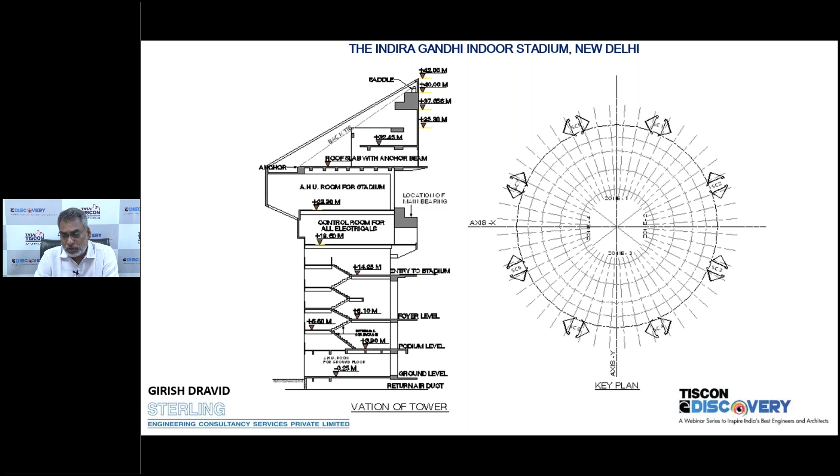All of you might have seen this in Indira Gandhi Indoor Stadium at New Delhi. I think in the first webinar by our chairman Kamal Hadkar, he had dwelt on this structure as well. A very beautiful structure, symmetrical one with 8 pylons and a beautifully crafted space frame.

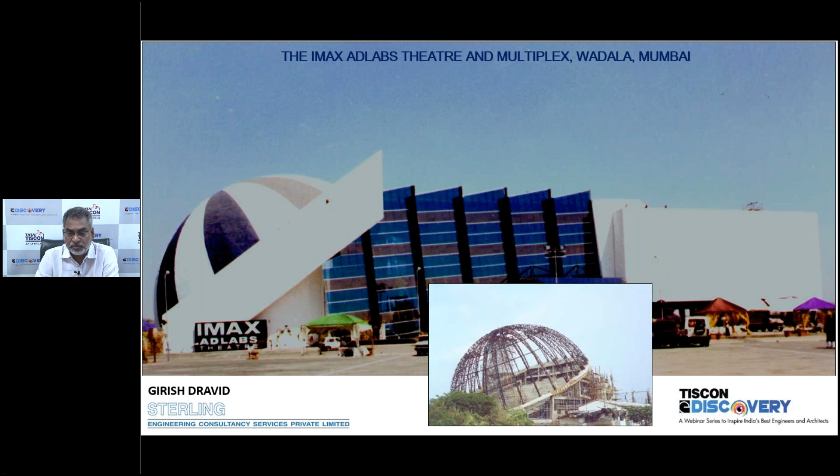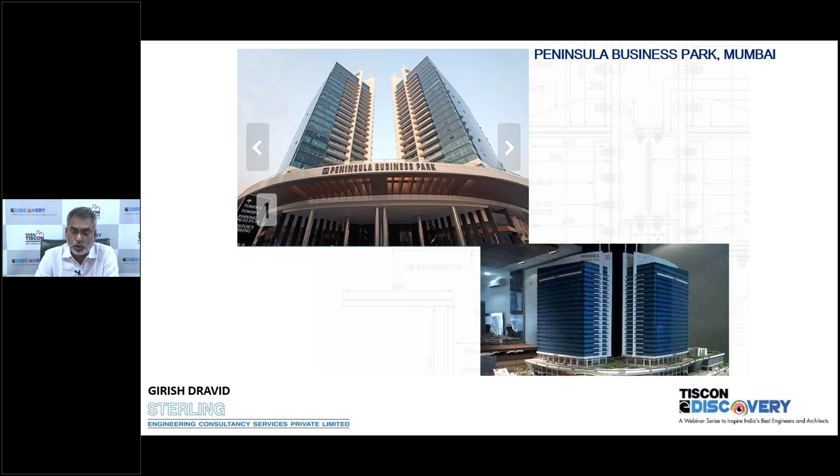Turbhe railway station at Mumbai, Navi Mumbai. IMAX Dome again at Mumbai, the first of its kind in India when it was constructed. A 16-meter cantilevered canopy for Peninsula Business Park in Mumbai, and some composite column construction as well in the main buildings.

The Cross Roads 2, a multi-use structure in Mumbai at Nariman Point, partly done in structural steel. You can see the framing plan, big girders, floating columns, and a very complex structure. You can imagine the use of different grids at different levels - commercial, then parking structures, and on top Inox and other theaters - very difficult to construct and design as well.

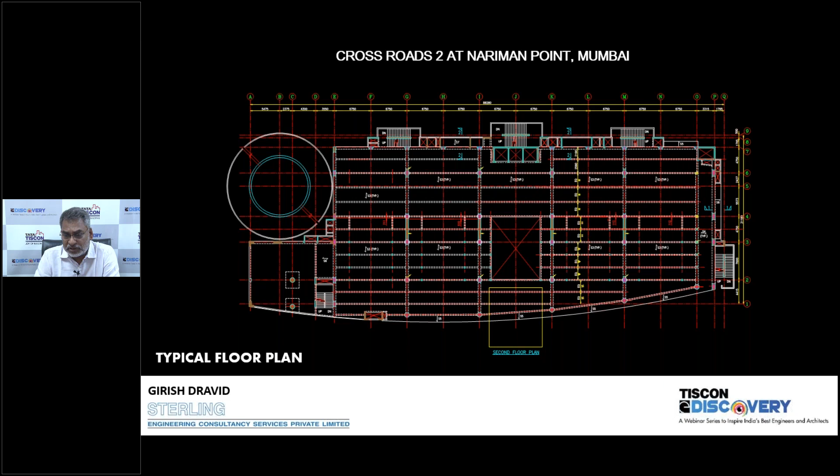National Sports Complex, NSCI at Worli. The very first use of composite columns in the Stock Exchange building at Mumbai, again Dalal Street, a very famous icon, everyone knows it.

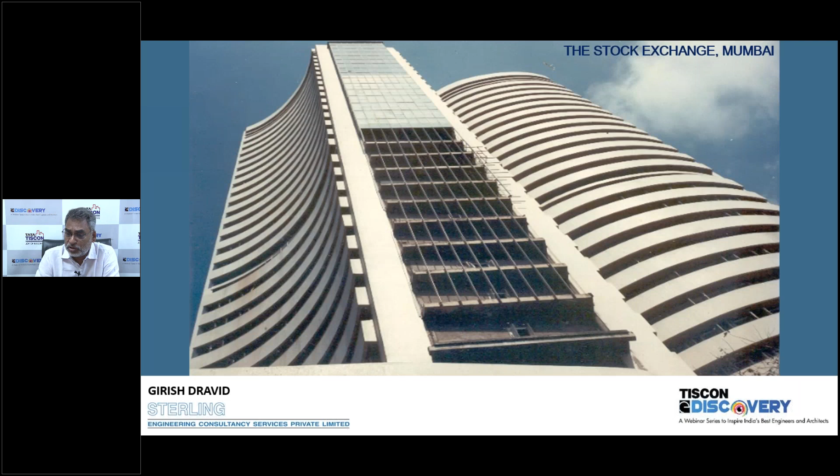ICICI BKC, again large scale use of structural steel and composite columns. A beautiful blend of Victorian architecture and composite construction in Mumbai again, that is ITC Grand Maratha.

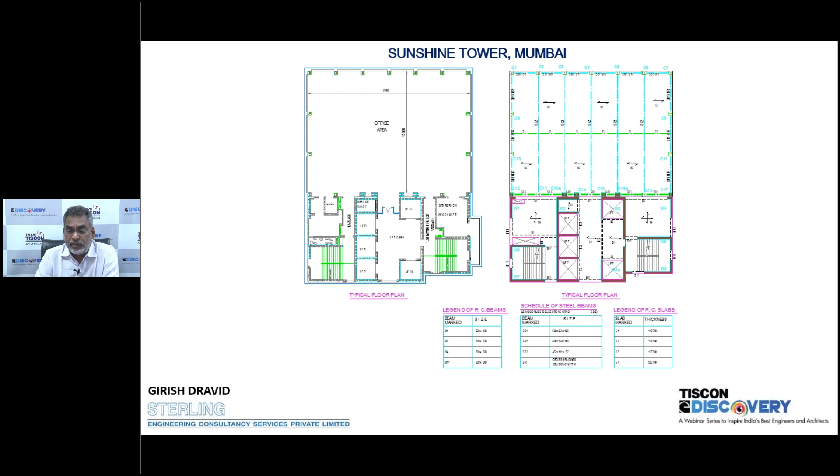Some office buildings you can see, Sunshine Tower at Mumbai, again composite columns using concrete filled tubes, eccentric core, a very challenging structural configuration for a tall building, involving shear core at one end and structural steel bracings on the opposite end to reduce the torsion.

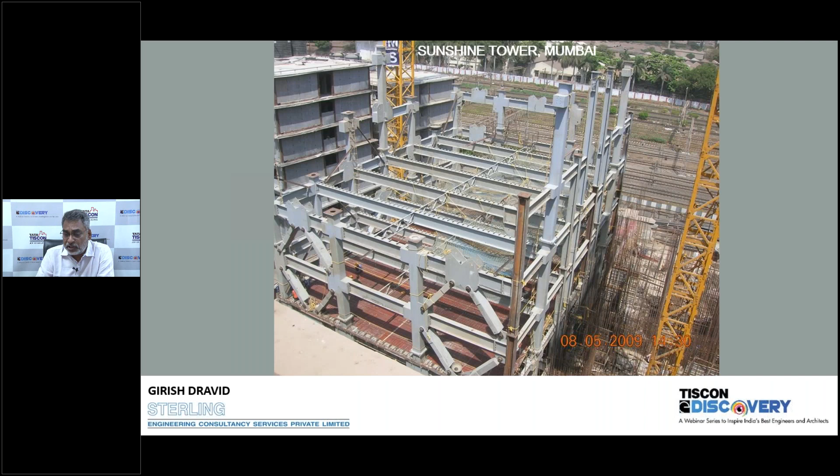Some pictures of Sunshine Tower. Connection details - we tend to give very simple connection details so that the behavior of members can be easily assessed and implemented as well. So it looks beautiful with all those structural cross bracings.

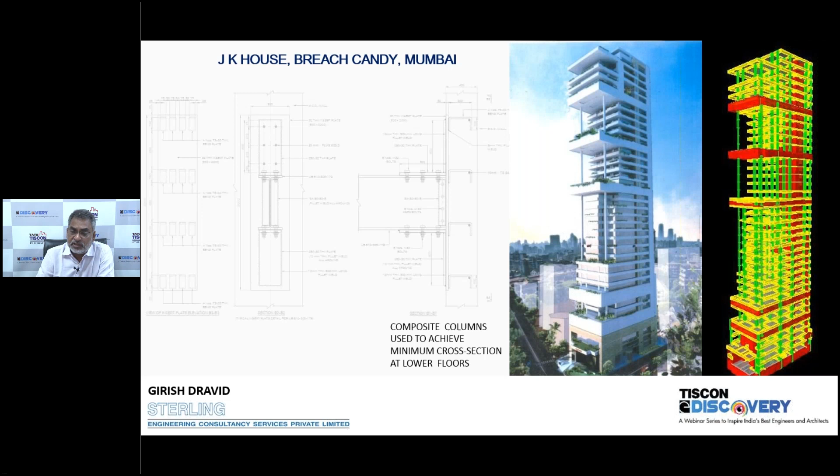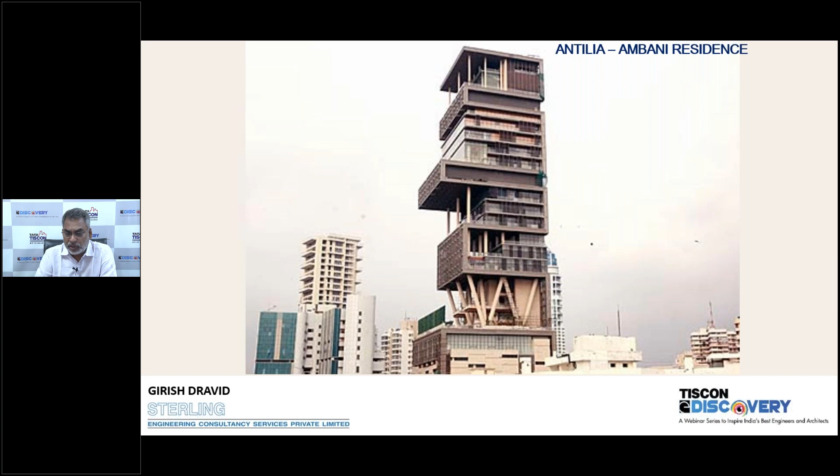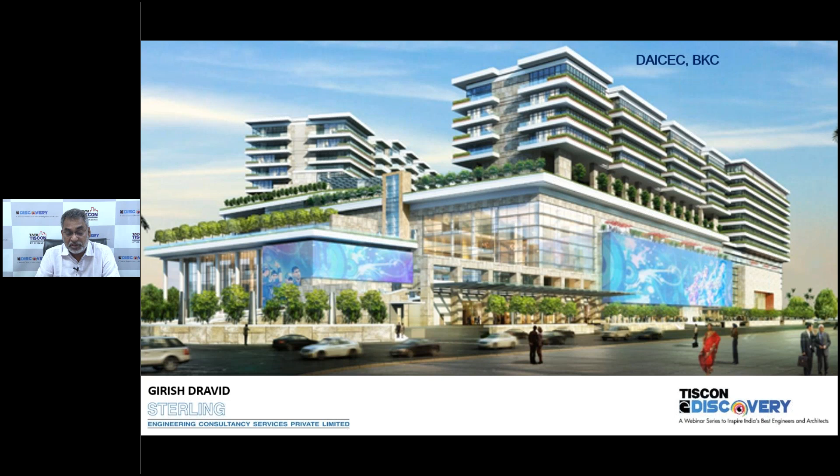So all these structures I'm showing you just to establish our credentials in structural steel design and construction. This is a very large project, Dhirubhai Ambani Convention Center and Exhibition Center at BKC - almost 30,000 tons of structural steel has been used. A very large exhibition hall is almost complete.

Now, having shown you some beautiful projects that we have done in structural steel, now I come to the case study, a technical case study of ICICI regional headquarters at Hyderabad. This is a building - almost 10, 12 years ago we started designing this project, and it's complete now.

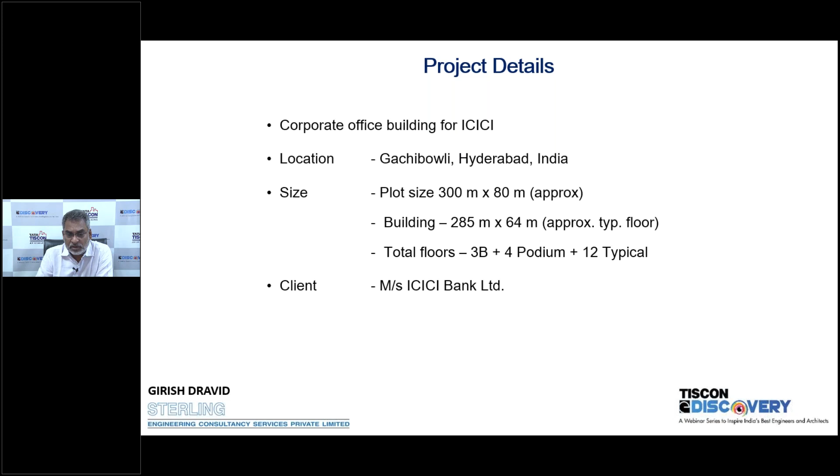3 basements, 4 podium levels, and 12 typical floors. It's at Hyderabad. These are the consultants involved - Hafeez Contractor was the architect, and L&T ECC was the civil and structural contractor.

Overall project size was almost 42 lakh square feet, and the client had given us a brief - the project had to be completed in 18 months. So naturally, after a lot of discussions, we compared various structural schemes - RCC, post-tension slabs, and steel - and so many.

We came to a configuration which was really composite in nature. So basements and podium slabs were decided to be constructed in RCC concrete, and by the time we came up to the fourth podium level, sufficient structural steel would be fabricated and ready for erection, although the columns had to come from the foundation because they were composite.

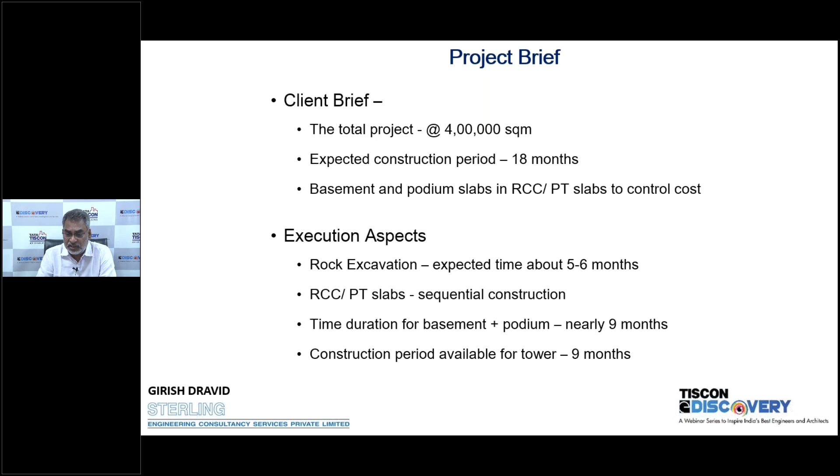The rock excavation itself was expected to be completed in about 5 to 6 months, and then another 3 to 4 months for RCC and PT slabs for basements and podiums. And then the superstructure, typical floors, had to be completed in 9 months. So naturally, we had to tap the potential of structural steel as a material for quick construction.

So excavation was done in 3 parts, so that when one part of the basement is ready for casting the footings, we plan to erect the steel columns and go up on one side, and the remaining 2 parts followed one by one. That sequence was carefully drafted with the help of CBRE, the project managers, and we also decided to issue the drawings in the same manner.

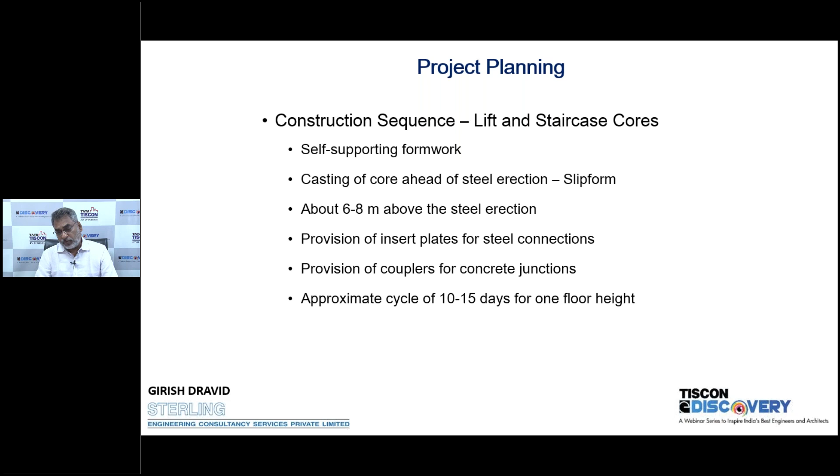In addition, the contractors suggested taking the lift and staircase core ahead of the typical floors. By slipform technology, the cores were taken ahead of steel erection by about 2 to 3 floors. Provision of insert plates was done for receiving the steel beams at a later stage, and couplers were provided for concrete junctions to screw in the reinforcement.

It was expected that for such a large plate, about 10 to 15 days floor cycle would be achieved. Columns were erected for 2 to 3 floors at a time, and you'll see some pictures later on. Columns stood for 3 floors, and then beams were connected at various levels simultaneously. Deck sheets were laid, and deck slabs were designed as if they were not propped, so all that time of staging and supporting the deck sheets was eliminated.

So in a sense, this huge building of 40 to 42 lakh square feet had to be completed in 18 months. So all such measures, in consultation with project managers and contractors, these ideas started creeping in, and we made a lot of good use of it.

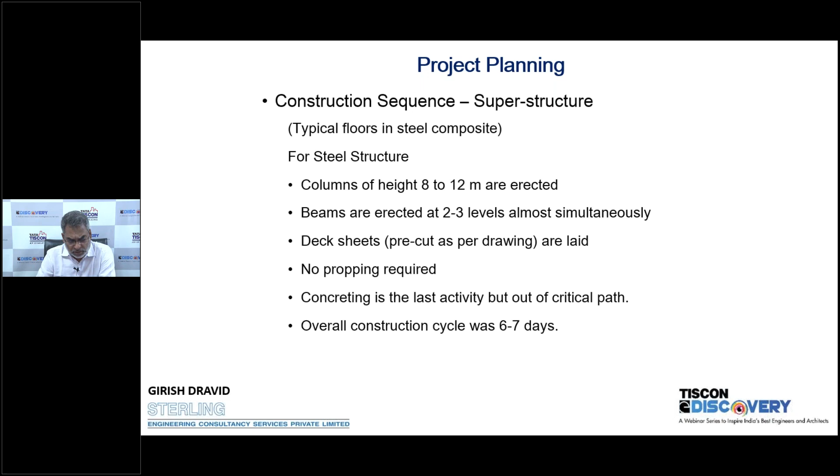Typical floor construction slab cycle was pegged at 6 to 7 days, which was an achievement in itself. In the footings, we had normal RCC footings and step footings, and again you can see some ideas like the crystalline method of waterproofing, so that activity time is saved. All such things were imagined and implemented.

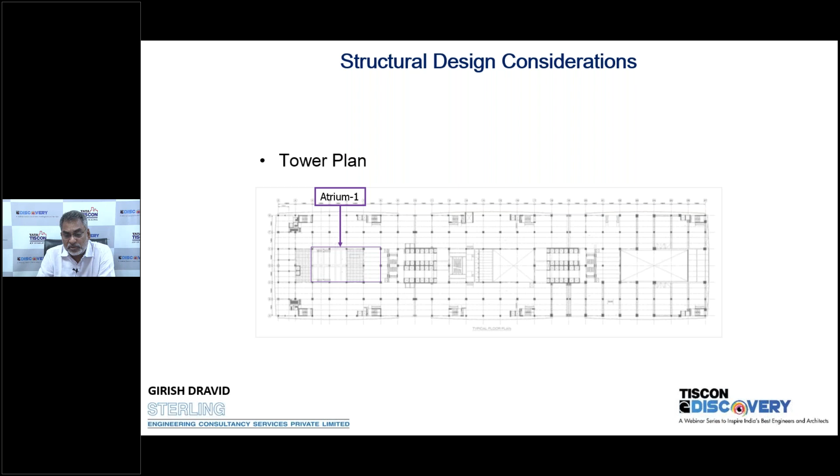Now, just to see what the structural system is for this building. The building, as I said, is enormous, almost 285 meters long, 64 meters wide, and the complexities involved can be judged from what I'm showing you now. There are 3 atriums in the building, and there are a lot of cantilever slabs, with a typical grid of almost 11 meters.

We quickly calculated the secondary beams, which are not frame beams, which we were going to repeat thousands of times, so real optimization was involved. They were placed at 3.55 meters center to center, UB 457. Deck slab Comflor 80 was used, imported from UK, from Corus at that time. Then the main frame beams were UB 610, 229 kg per running meter.

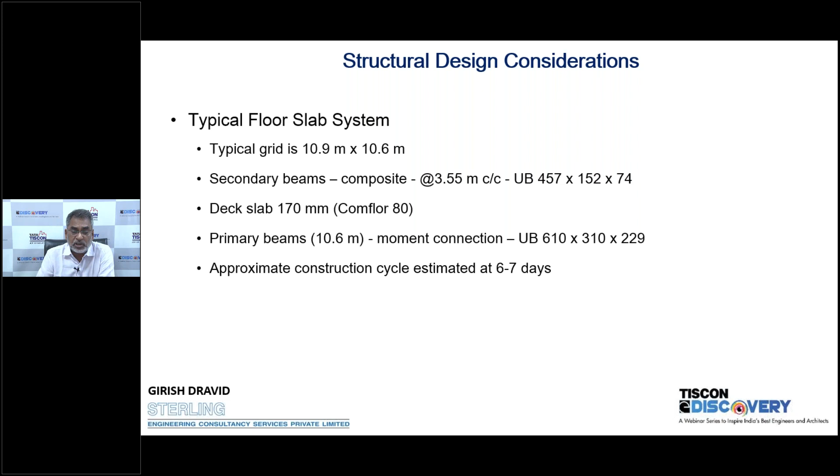And all this, the number of beams in a bay, secondary beams, main beams, the number of columns to be erected, the number of deck sheet panels to be laid, all this was calculated to suit the estimated cycle of 6 to 7 days.

Lateral load resistance was achieved through large lift banks, core walls in the central part, with service lifts and staircase cores on the perimeter. Brace frames are also provided so that additional lateral resistance was achieved.

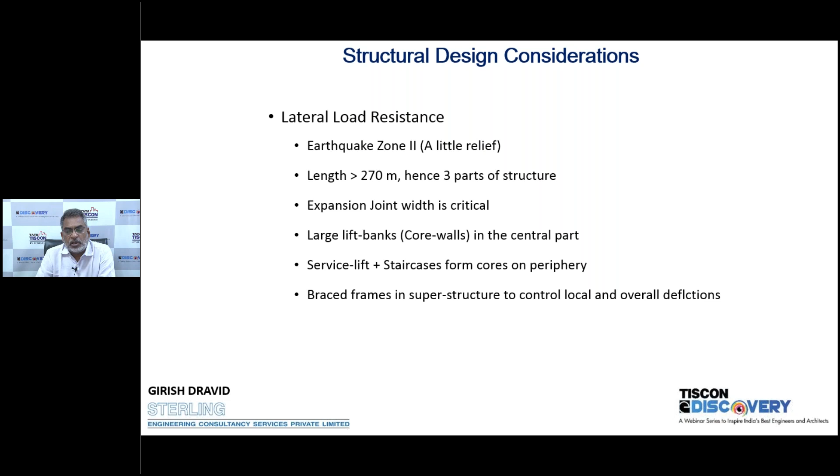The length of the building is almost 270 meters, so naturally we had to provide separation joints or expansion joints, as you can see. The building was divided into 3 parts, so each part separately had to be laterally stable.

So these lift cores, which were distributed, you can see some part of the lift core is going into the neighboring block. So these lift cores for the first and third blocks were eccentric.

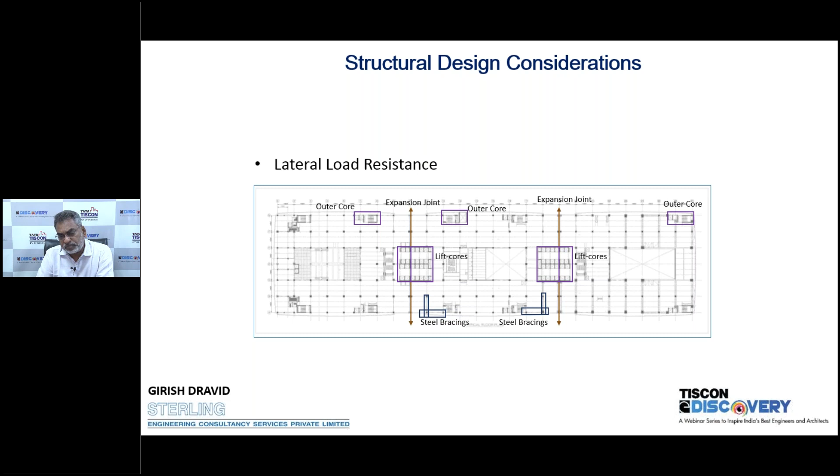So we had to use these outer cores, staircase cores, also as the lateral load resisting system. Although only 3 cores are marked, all the staircase cores were used as lateral systems, along with steel bracings on the other side, again in all 3 blocks. So this comprised the system that created that lateral load resisting system effectively.

Almost 100,000 cubic meters of concrete was used, and you can see the ratio. The reinforcement ratio was 20,000 tons for a lakh of cubic meter of concrete. It's not much, but that's because we used deck slabs, a very thin layer of concrete, with almost no reinforcement in the deck slabs. So that's why the reinforcement ratio is quite less.

But at the same time, structural steel, almost 22,000 tons, was used. So these are some of the numbers. It's a gigantic project, but our ratios were quite in proportion.

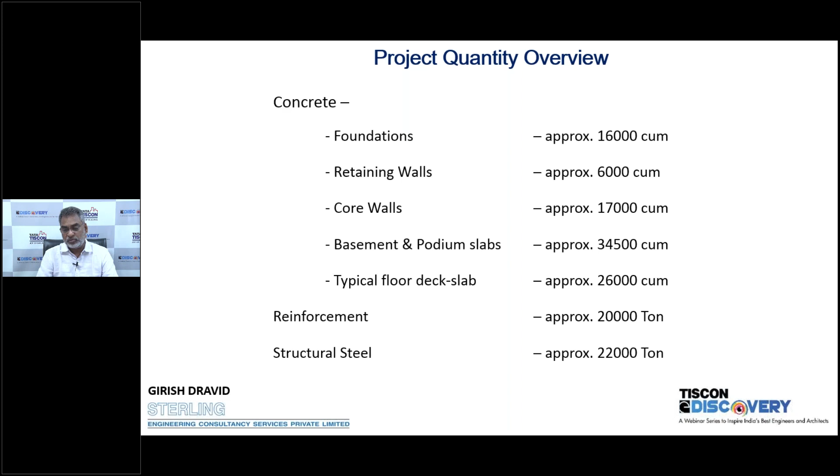Now, although the image showed a box-like structure, there were many design challenges. In the lobby itself, the front lobby, almost 2,000 square meters of column-free space was required. Our architect, Hafeez Contractor, if we gave him the liberty to design, naturally such challenges were expected. The height of the lobby was 16 meters, almost 4 floors.

And above those 4 floors, the normal office building had to be supported. Naturally, there were transfer floors, transfer girders, floating columns, and the girders spanning -- I'll show you the plan. This is the lobby plan. The main girders span 33 meters and the secondary girders span 21 meters. This is the plan of the front lobby where these girders are highlighted.

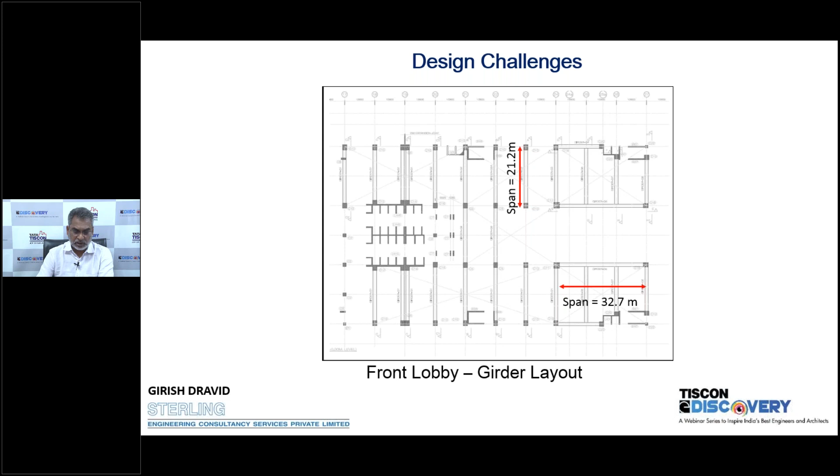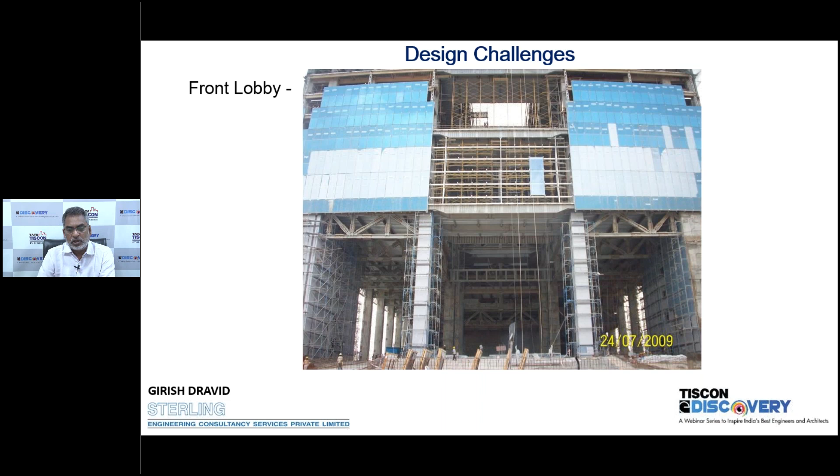See the picture, and if you just want to see the scale, look at those human figures at the bottom and how high the lobby is. This is that 2,000 square meter lobby that we are talking of. This is the framework, and the transfer girders themselves were 3 floors deep. It's easy to create such transfer girders in steel -- imagine what could have happened if this was in concrete.

These diagonal bracings, although seen in the facade, if you go to that building and look outside from the internal office space, they look beautiful. We structural engineers think the steel sections going here and there, diagonal, vertical, look beautiful. Even Hafeez Contractor thought so - he never complained about diagonal bracings.

On the right hand side, you can see a cantilever bracket, and the cantilevers were supported on such brackets at every 6th floor. There is no limit to architectural imagination and how you treat these diagonal bracings.

Mind you, these bracings are there inside the offices as well, and Hafeez has done an excellent job interior-wise too, using these diagonal bracings very aesthetically for internal spaces.

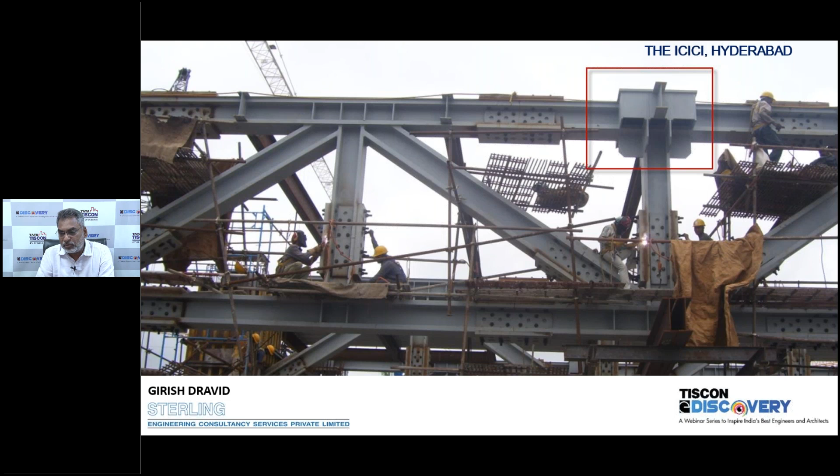Otherwise, people are busy splicing the diagonals and verticals of the trusses. The truss was naturally erected in pieces. This is another picture showing the main transfer girder, which was 33 meters long.

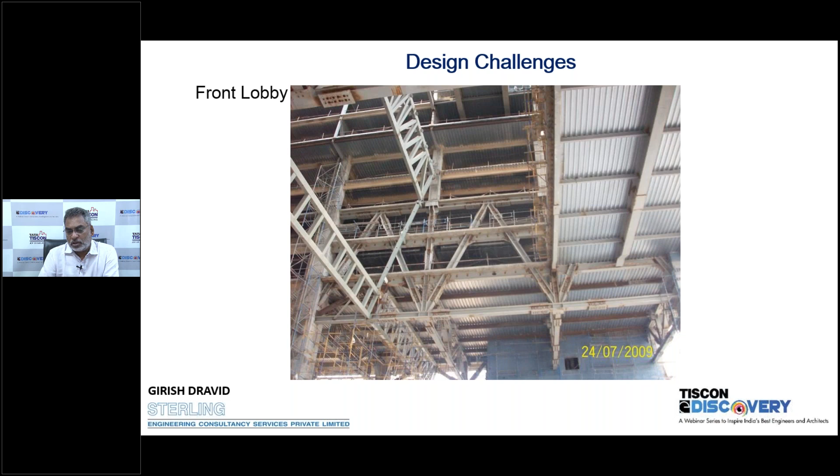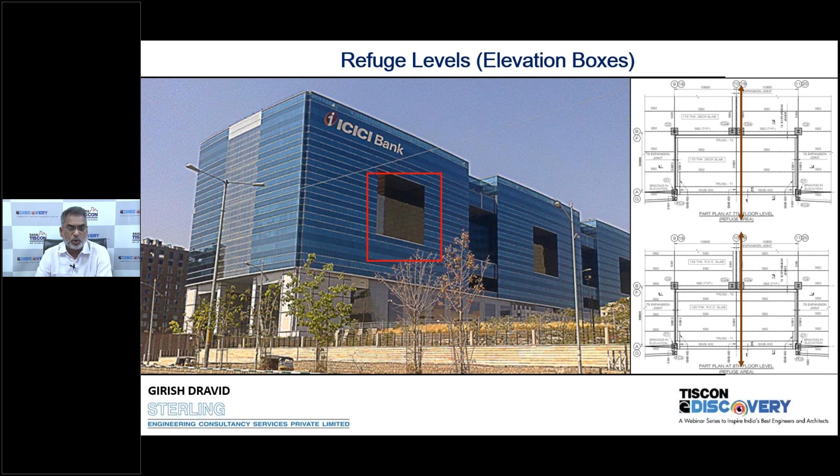So it was a very tricky situation, but we had to come up with some very clever connection details - pinned on one side and rolling roller details on the other side. These trusses were connecting the two blocks across the expansion joint without sacrificing the concept of that expansion joint.

Not only were there complexities due to architectural concepts, but during construction itself there was a change in design brief. The building was initially designed for 22 floors, and suddenly we were told it had to be only 17 floors. Some cantilever extensions had to be provided to accommodate the FSI loss because of the height reduction.

Somewhere those atriums also had to be covered up to gain that lost area. So we had to bridge the atriums with actual bridges, or there was an atrium in the rear portion where a guest house was introduced. So another round of design and more transfer girders to float the columns of the guest house, which had a different grid than the original grid of the building.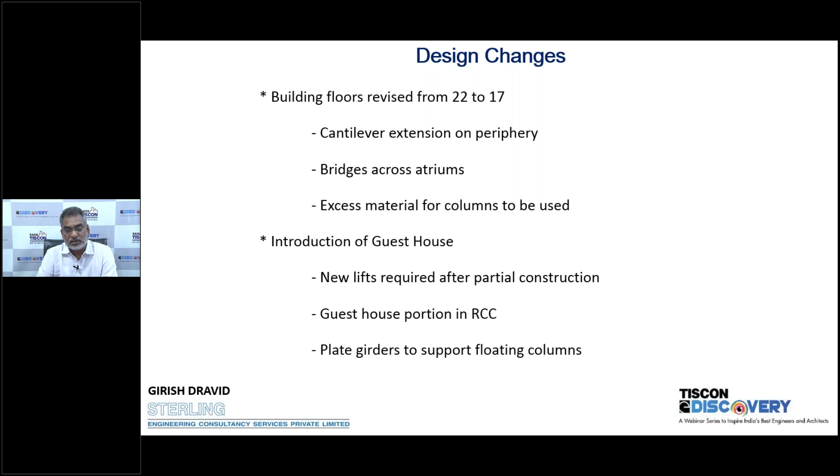Then there was another brief that the material procured for 22 floors was to be used in the same building. Not all the material was procured, but some material for columns was procured right to the terrace. Now that excess material, which was not going to be used in the 17-story building, had to be converted to a usable set of sections for the 17-floor building. That was another challenge, and we used most of the material which was procured.

Two new lifts were introduced. The guest house building was planned with RCC because more floors had to be accommodated in lesser floor height.

At the same time, podium slabs had come up to a certain level, and we had to introduce steel girders to support this guest house. So a lot of complications.

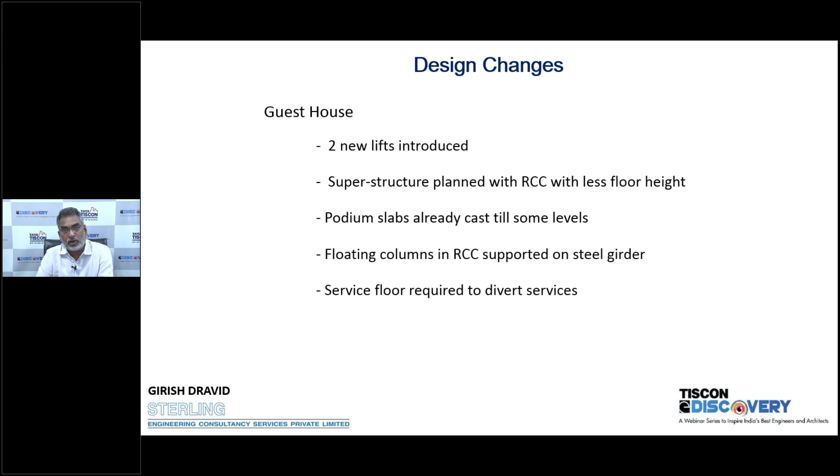The floating transfer girders for the floating columns. Constructionally, as I mentioned earlier, the columns were erected for 2 to 3 floors at a time.

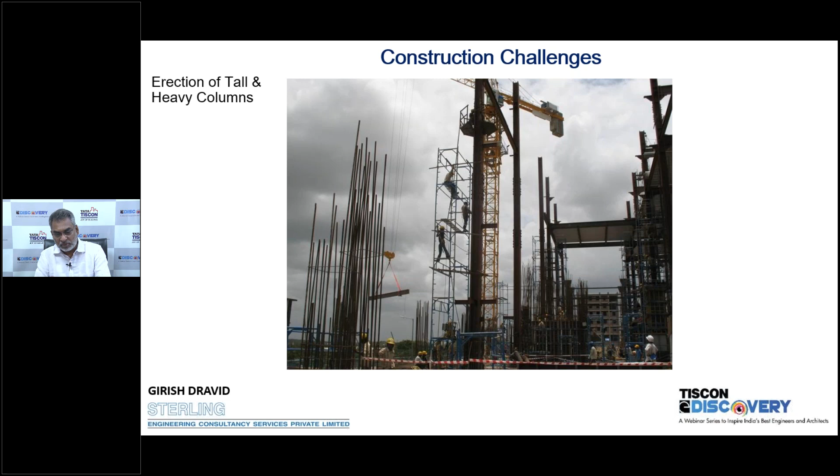Very telling picture - this is a detail of how the reinforcement was tied around the structural steel beam column.

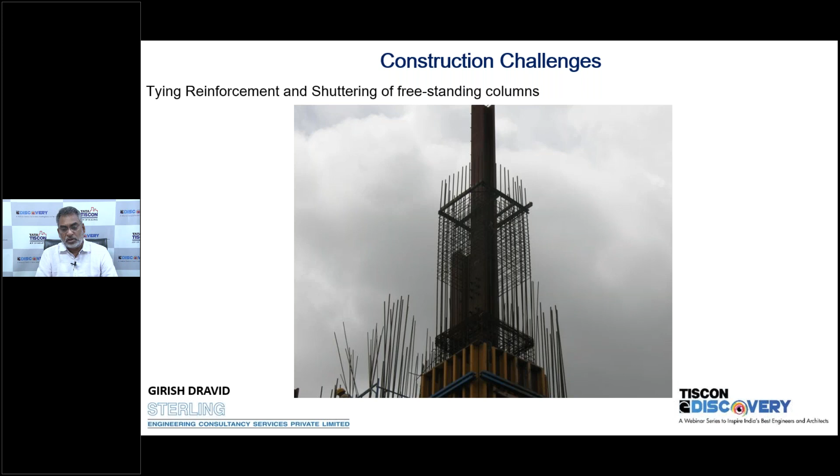The transfer girders were erected in pieces because they were huge, spanning 20 and 30 meters. Lifting and erection was a big challenge.

Again, transfer girder erection - you can see they are tied also with cross ties, temporary cross ties during erection so that they don't topple over.

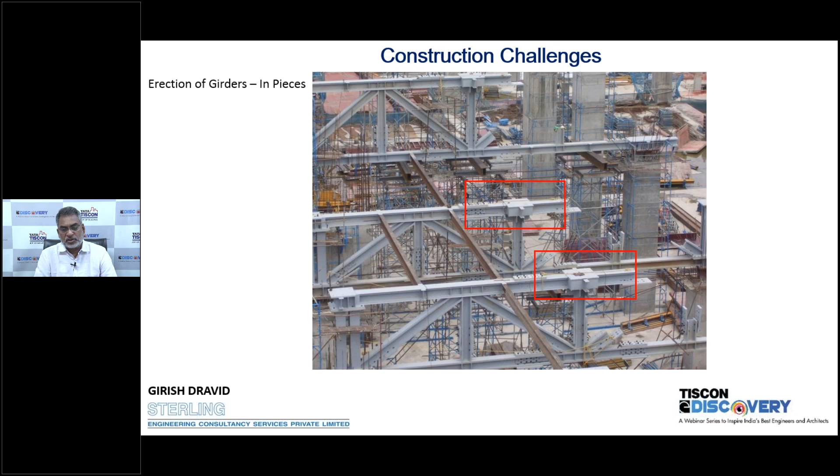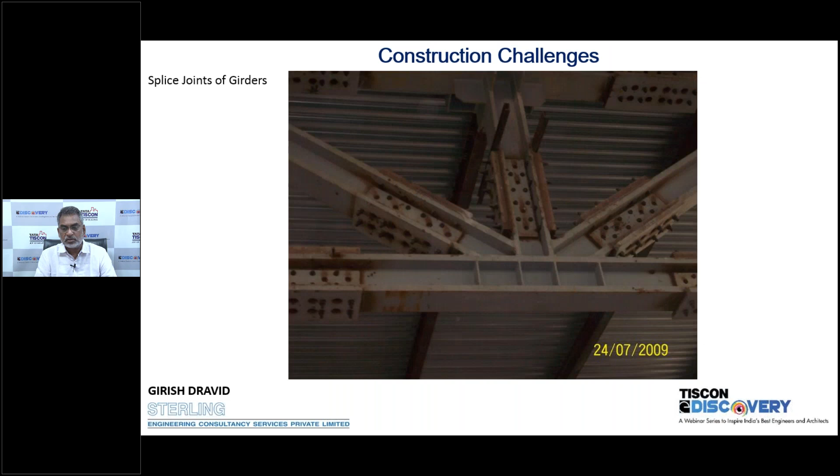Splice joints for the transfer girders - these are at the fourth level in the lobby. Typical splice joint detail.

The bracket that we talked of, and the transfer girders for the guest house.

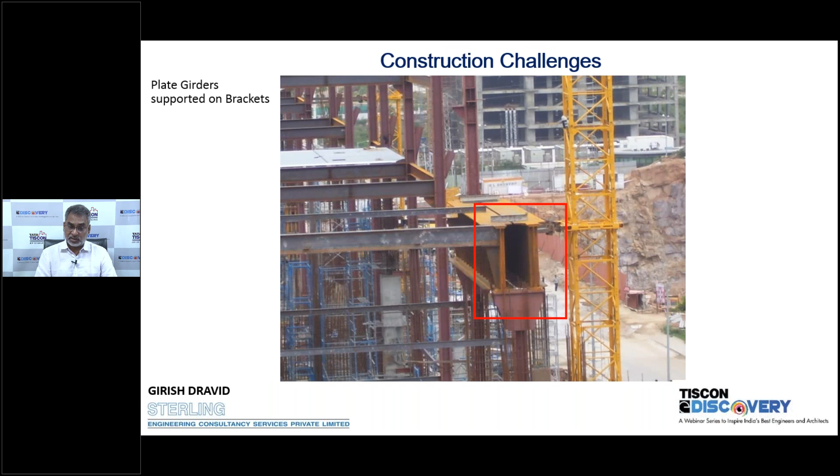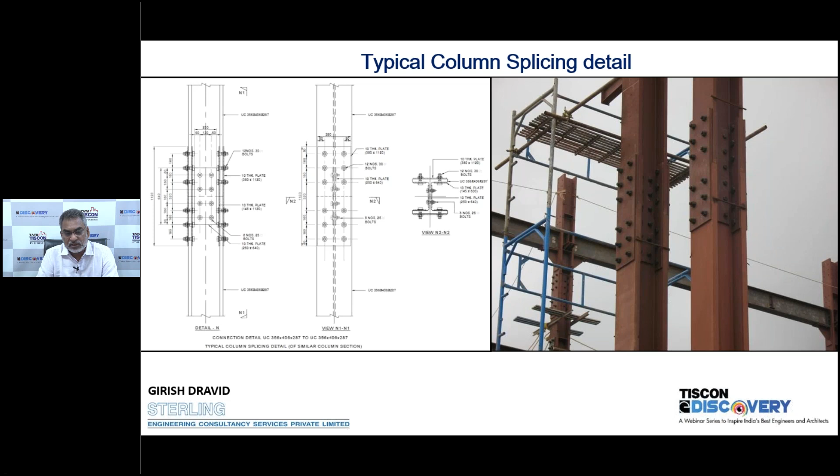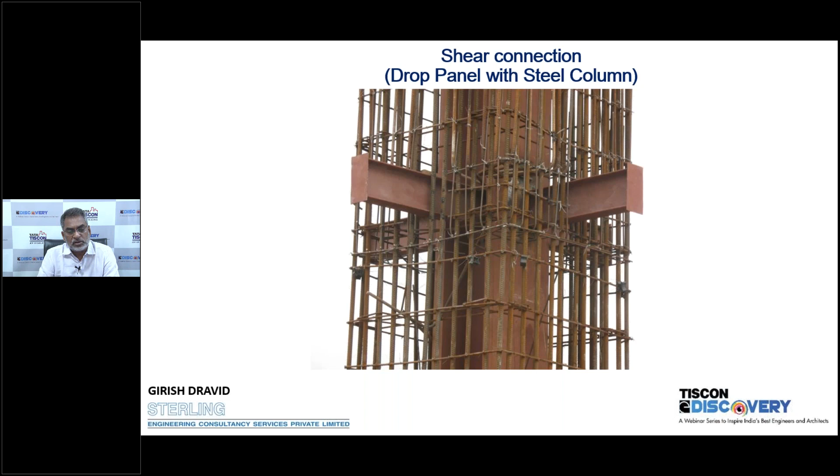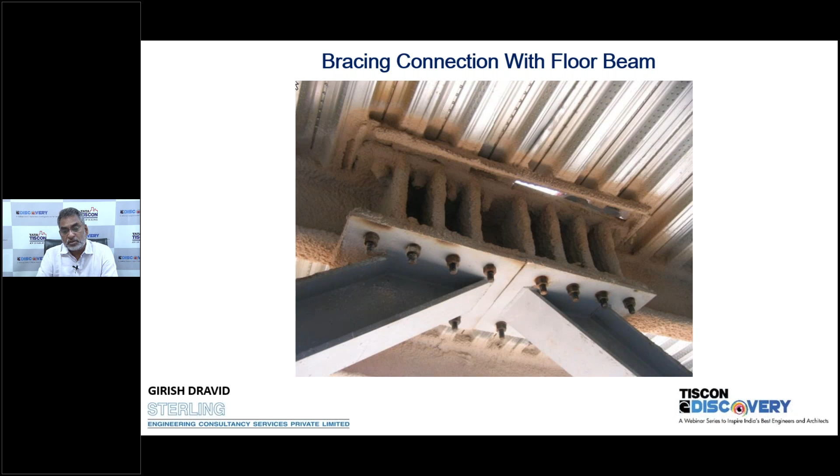The bracing connection. Bracing connection with stiffeners, because these braces were A-type braces at some places, so they were joining the midspan of the beams. This is the bracket, peripheral bracket to support the cantilever projections. This was provided at every sixth level.

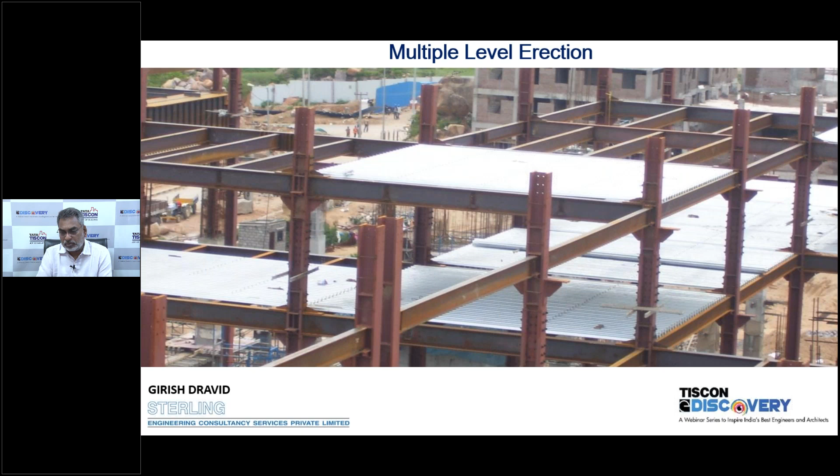Very fast construction practice adopted. This is the deck sheet with studs. In those days, 10, 12 years ago, gun welding was very rare, and we used it for the first time, as we know, to fix the deck sheets to the beams below. Almost no reinforcement was used in the deck sheets.

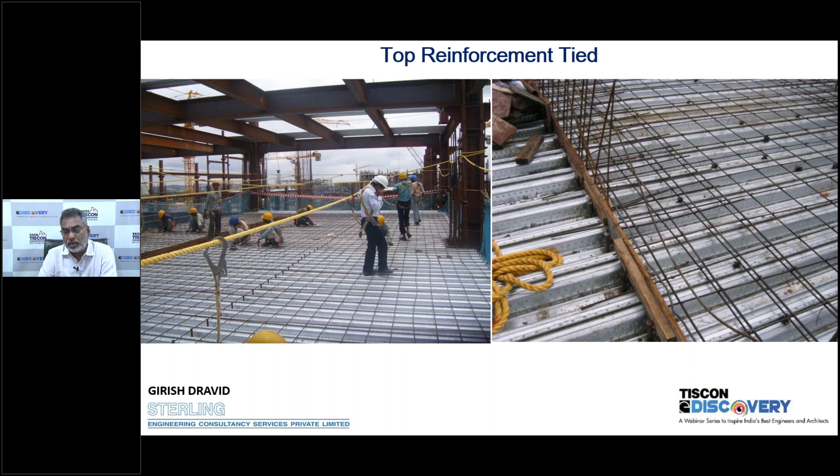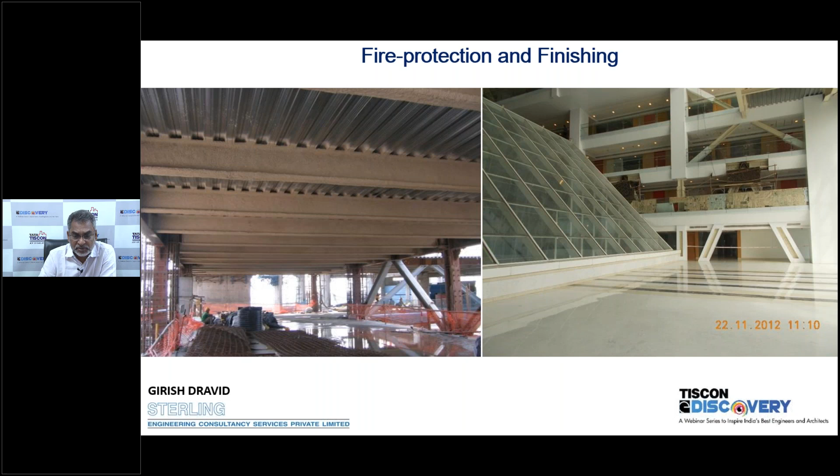So that was a technical presentation for the ICICI building. And while we are doing so many buildings in steel, we have gained a lot of experience, so I have jotted down some points which might be useful.

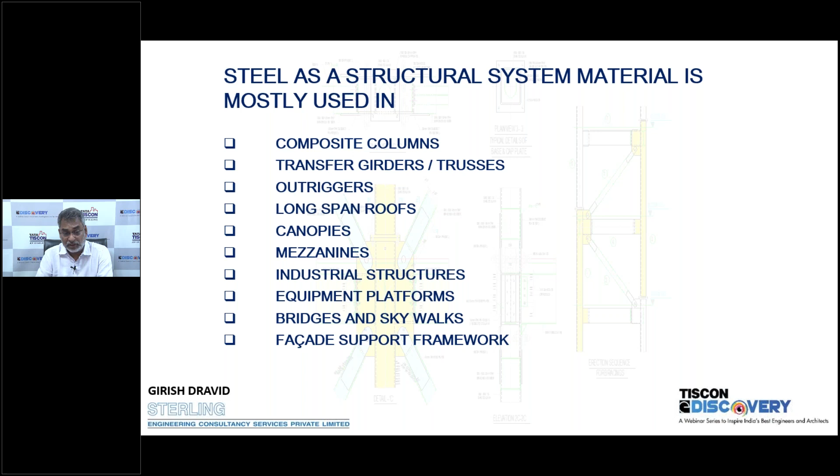Where do we use structural steel? We use it mostly in composite columns, transfer girders, outriggers, long span roofs, canopies, mezzanines, industrial structures, bridges and skywalks, facade, equipment platforms. So this is where structural steel is mainly used. In tall buildings nowadays, there have been buildings where there is a major use of structural steel in flooring as well, but these examples are quite rare even today.

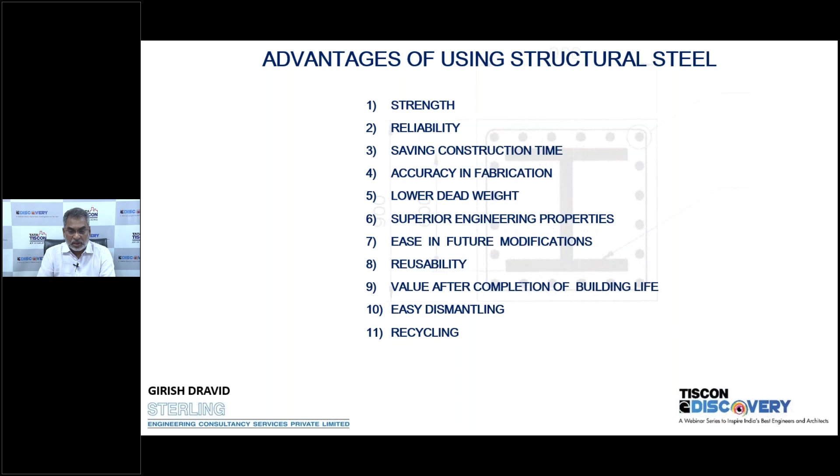So, as I say, although we talk of structural steel in many seminars, webinars, and a lot of discussion goes on, in our company, almost for every project we create an option of structural steel, present it to the client, discuss pros and cons. This screen shows advantages of using structural steel like reusability, accuracy in fabrication, saving construction time, easy dismantling, recycling—all this we tell the client. At the same time, we tell them about the disadvantages of using structural steel as well, which are really not disadvantages in using structural steel, but in the process.

The cost definitely is higher, overall higher structural cost. There is an early investment. You have to freeze the designs. Changes should be avoided as much as possible because you already invested in the material.

Once you procure that material, there has to be a lot of storage space somewhere near the site. Since construction involves beams and columns, headroom is always an issue. Since we are dealing with linear elements, there has to be discipline in architectural planning as well, not only structural. Most of the times, if you are developing a building to sell to customers, you might have to finish the building to avoid showing the decks and ribs of the deck slab.

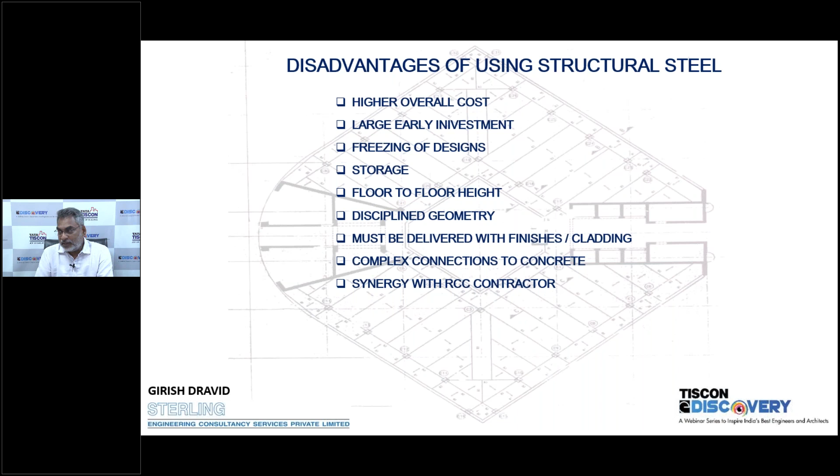But all these pros and cons we discuss with the client, and most of the times the client is convinced about other things like time. When it comes to cost, there is a problem, and naturally the balance goes in favor of concrete. Although the client understands that time is also money, there is financial cost involved, but ultimately the overall final cost wins in most of the cases.

I'm not showing this to discourage you from using structural steel, but what I'm going to show you now is a live example of an optimization exercise that I did with a contractor.

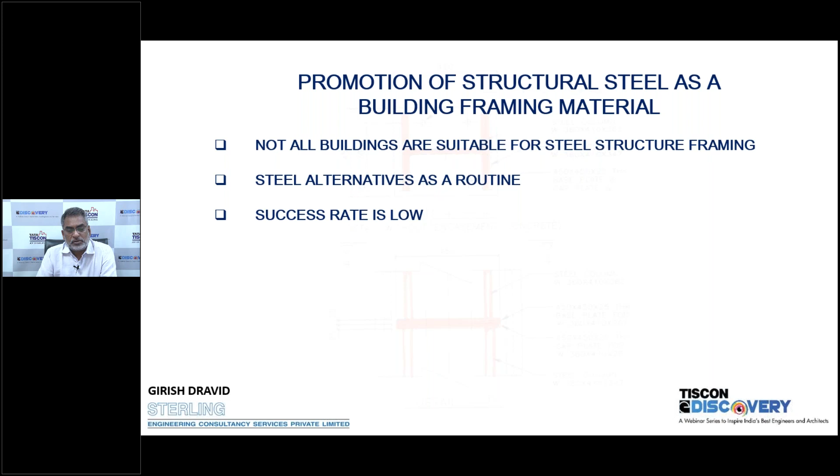Before that, when we talk to the client, and even for this case study, we discuss with the client and the contractor that in order to use more and more steel in buildings, it is not necessary to insist on a total steel solution. It's not necessary that your columns, beams, deck slabs and bracings all go for a total steel solution. You can have a composite building wherever you see advantage of using steel, use steel, otherwise stick to concrete.

It is cheaper. The technology of pouring, manufacturing, placing, and vibrating concrete is absorbed in our construction industry - anyone can do it. Whereas steel construction requires a lot of training, expertise, and resources like specialized equipment and trained welders. So if we are not confident about going for steel construction, we should not indulge in it. Leave the difficult part to expert people, the steel contractors.

If they are being costly, minimize their usage, but use steel to such an extent that you derive full advantage of using structural steel, as we discussed earlier, the time saving and all other things. So identify key areas where steel scores over RCC in terms of ease of construction, speed of construction, repetition of member lengths and sections, composite columns, etc.

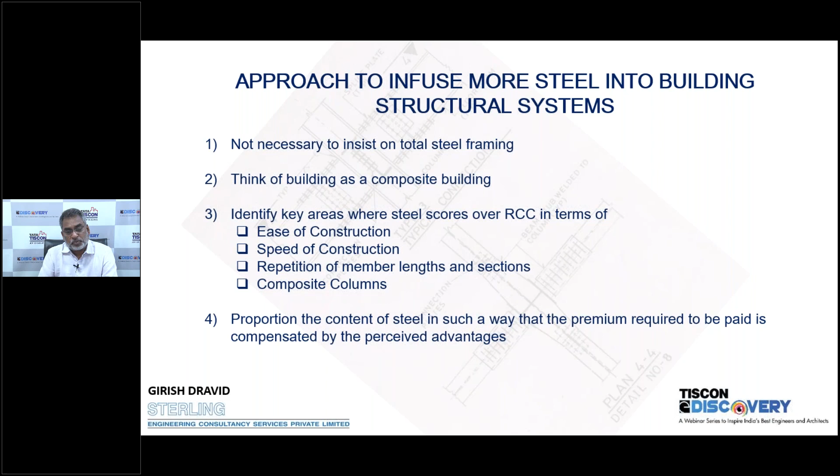So having done this, what are the low success rate factors present to convert a project into a steel structure? This starts from the tendering process itself - there are competitions, and the first is the architectural design.

When an owner or client decides to launch a project, the first thing he does is approach an architect. The architect, without thinking of the structural system or the structural construction material, comes up with a space plan and an elevation, most of the times regardless of giving any due regard to the structural design or MEP design, nothing. So it's basically a visual appeal which appeals to the client, like a monument.

The client evaluates 3 or 4 different elevations and space plans - that is the first competition. Then the next person called in is the liaison architect, and he advises the architect and the owner whether that plan can fit in the regulations, local DCR and all that.

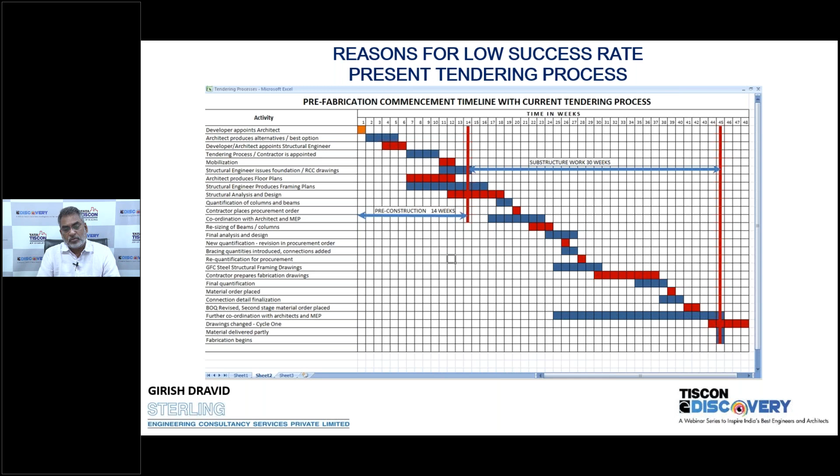Now, I had done one building, 34 floors, actually two towers sitting on one single podium in the Delhi area. I'll just show you through what stages we went in to arrive at the final construction cost. So this was a 15 lakh square feet building near Delhi, Noida precisely.

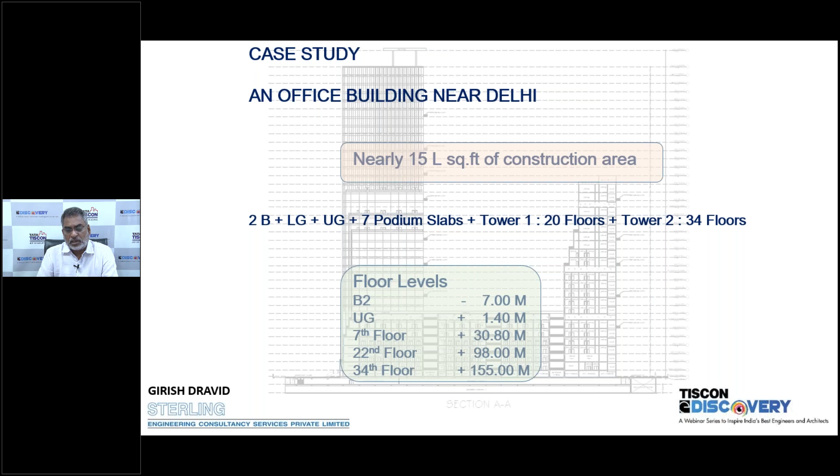155-meter tall building. The original scheme was RCC: foundations, raft, retaining walls, shear lift walls, and columns were considered to be composite. Beams at all levels would be steel and laid over with a deck sheet and concrete. So this was the client's brief, in fact, and this was the scheme with which the client's consultant had put out the tenders.

The contractor who was bidding for this came to us, and then we sat on the scheme. Fortunately, the consultant and the owner gave us complete freedom to change the system the way we want in order to optimize. That was the reason why we could go through this entire process of optimization one by one.

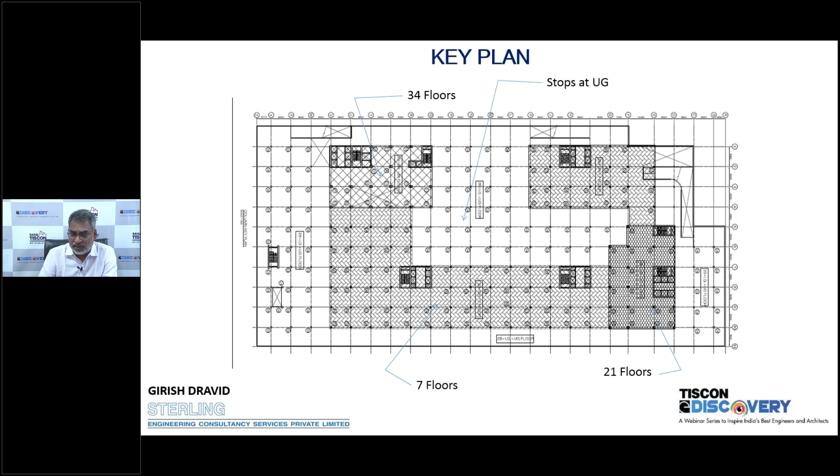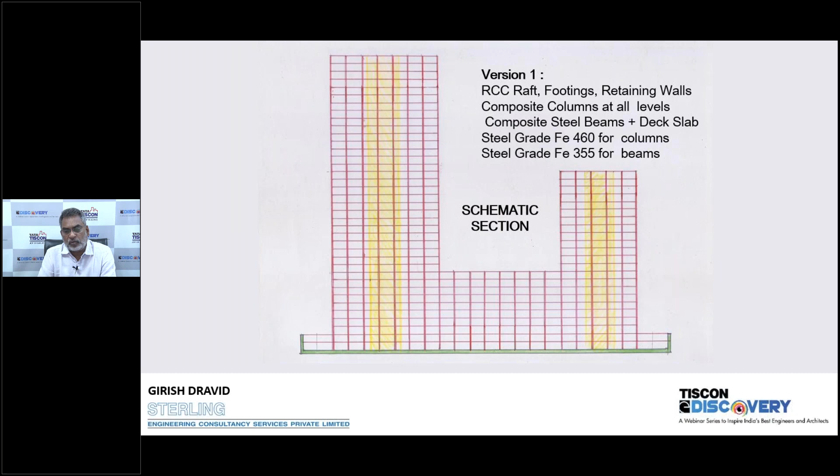First, in discussion with the contractor, we discussed the number of secondary beams to be provided in a typical bay, because the contractor told us that his cost doesn't necessarily depend only on the material quantity or weight. The number of beams that he has to lift and erect in place matters a lot, what they call the craneage. So we did this preliminary exercise: one beam in the bay, two secondary beams, or three secondary beams.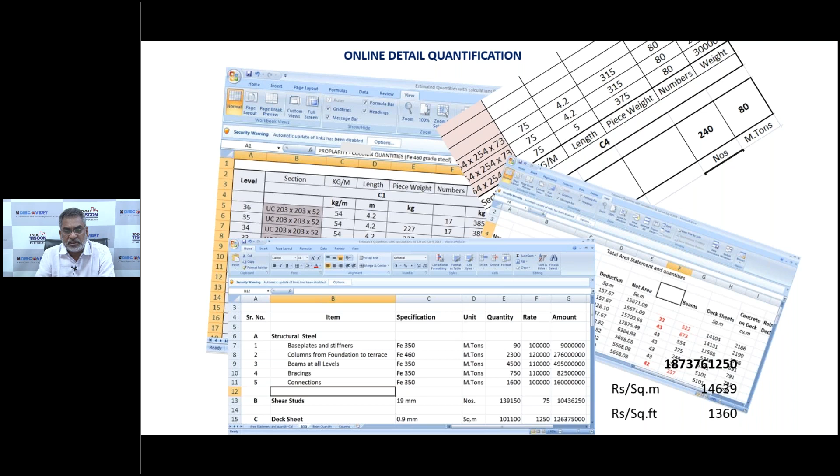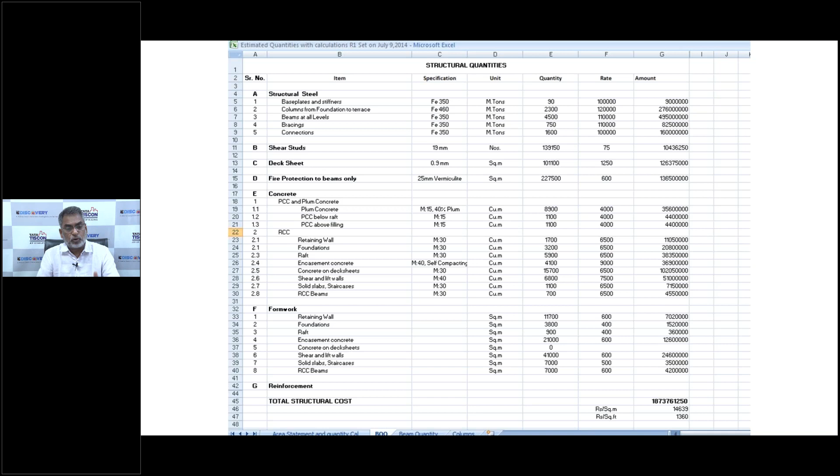You can see, again, I'm not going into the numbers, but just look at the last number. The total structural cost came to 1,360 rupees per square foot. This involved concrete for plum concrete for leveling, PCC, retaining walls, foundation, raft, encasement concrete, just the scheme that was put forward by the owner's consultant, and of course structural steel, base plates, columns, beams, bracings, connections, etc. So 1,360, you can remember this figure.

But when this figure came out and the contractor's people worked out their own cost, it came to 1,530 rupees per square foot. So this is the difference between the cost calculated by the consultant, that is us, and the cost worked out by the contractor's procurement team and project team.

What was the difference? We had used 460 grade steel, and the market rate for 460 grade steel was quite high, it was not available at that time, so it was selling at a higher price. The contractor suggested using 350 grade. We used 350, checked the quantities, and saw that using more steel, because the grade is now less, we had to use higher sections. Even then, the cost of steel was coming out lesser.

He again gave us feedback that self-compacting concrete is costlier, so quality will be assured with normal concrete as well. This assurance was given by the contractor himself.

Then the rate of fire protection assumed by us was less. He produced actual quotations received by him from vendors, including for the deck sheets. So all this together, as against our 1,360 rupees, his cost came to 1,530 rupees.

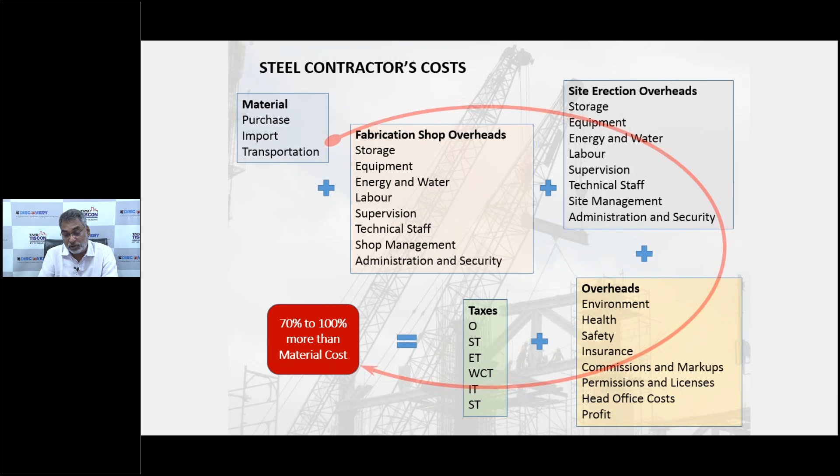We just go by some figure that, okay, structural steel would cost a lakh of rupees per ton, including everything. But no, it can change. And a contractor who can be our friend, if he is in our team, will actually tell us what could be the cost of material to be used in columns, beams, deck sheets, fireproofing, and all that. So our problems are different.

Contractors' problems are different. Structural consultants will generally talk about codal provisions and performance criteria, deflections and accelerations. Then the steel building should actually function as a concrete building - we don't want beams being seen in the soffit of the slabs. All those things - we are under tremendous pressure to give a structural configuration the way architects and the owner want, whereas contractors' problems are different.

But if we come together, contractor and consultants, and if they are given free hand by architect and owner, if the objective is to reduce the cost, there are many ways. One important point here that I mentioned is...

Introduction of technology advances is almost discouraged at the tender stage. Whereas if the job is given to a contractor to bid for a design and build project, the contractor himself will come up with a lot of new technologies. He is ready to invest in new technologies in order to optimize the cost.

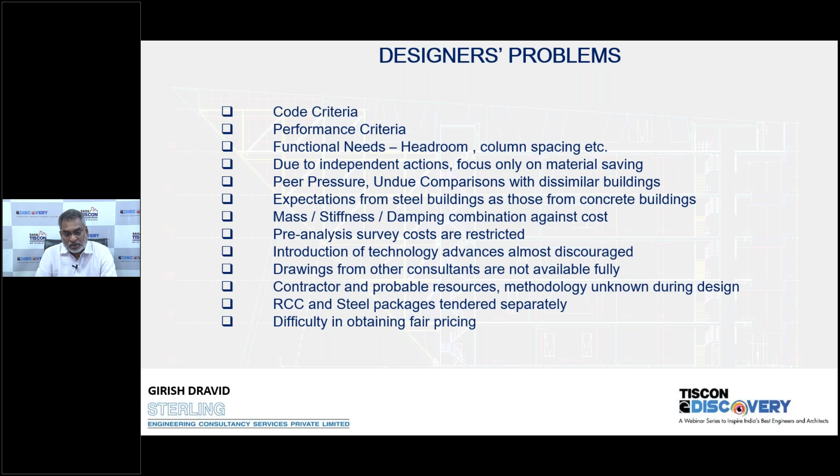Cores are still in concrete, nothing has changed other than that. But steel grade had changed to Fe350 for all steel members. By doing this, again doing all ETABS and everything, all earthquake analysis, we came to a cost of 1350 rupees. Not much difference, right? But you can see all those figures in red, those things have changed.

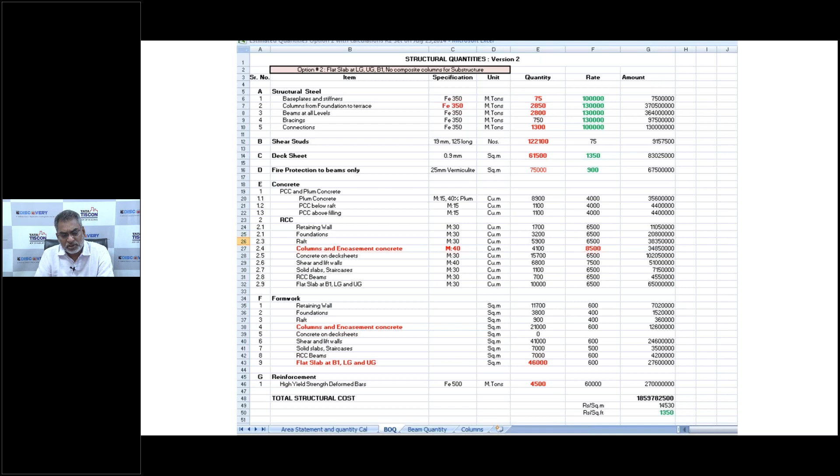Naturally, the contractor is not happy. So another set of comments came from the contractor.

And concrete grade for column encasement and shear walls changed to M50 from earlier M40. Thickness of shear walls was changed to 600, increased. Spacing of secondary beams was changed to 2.67 meters instead of 3.33 earlier.

So all this resulted in the next version. See the last one also - deck sheet thickness reduced to 0.8mm as per design provided by the deck sheet vendor. So now he is not going with the design provided by us, but the vendor has provided him an optimized design.

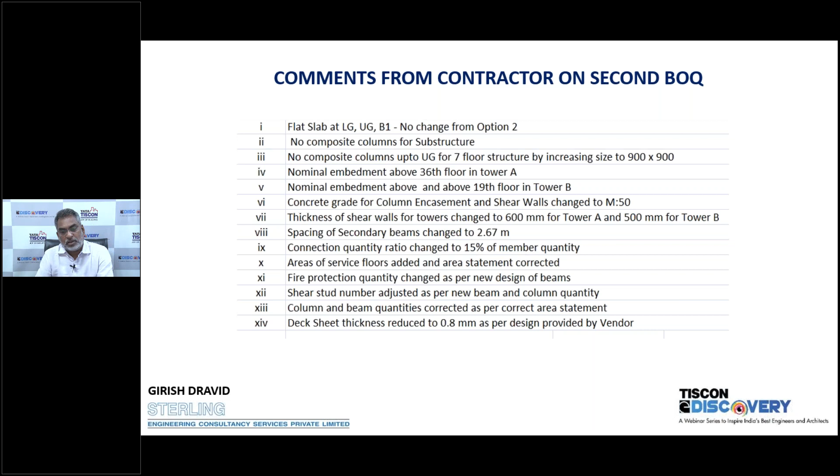So this is version 3 of that. What is the change here? You can see the top four floors, the columns are purely RCC. We eliminated all the embedded sections there.

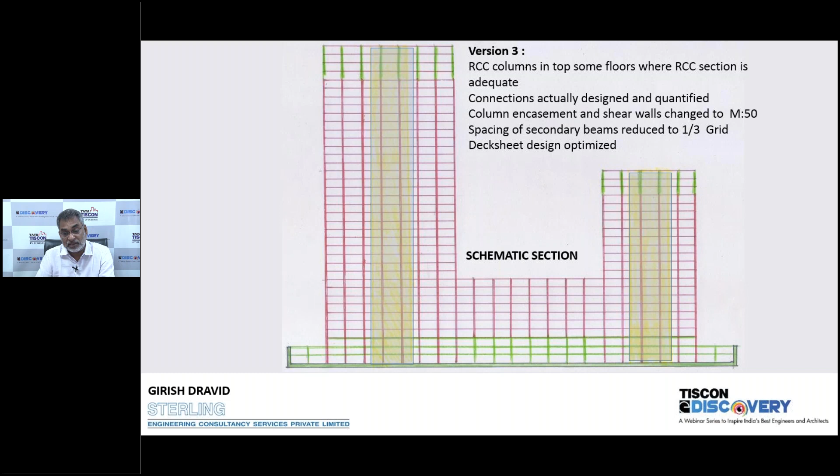Earlier we had assumed about 15% over and above the material quantities as connections, but here we actually designed and quantified them. Spacing of secondary beams was reduced to a 1/3 grid, deck sheet design was optimized, and now the cost came to 1238 rupees. So here the contractor was satisfied.

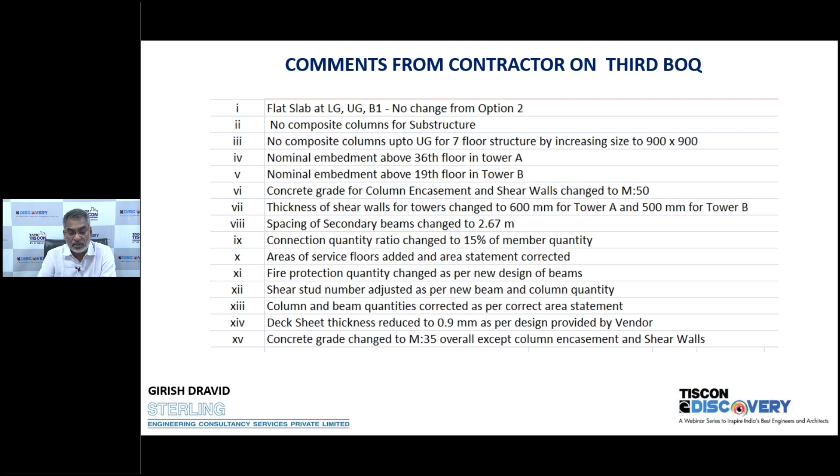He said yes, this is the figure, because it was coming closer and closer to the RCC cost that was estimated, which I'll show you later. But these are the comments from the third BOQ also, so the comments never ended until the contractor was completely satisfied. Let's not go into this, but the graphic will show you what it is.

All concrete except encasement and shear walls changed to M35 now, which was earlier M50. Naturally the column sizes increased, but it was okay. We went back to the owner and architect and they said it's fine, as long as the cost came down. Columns and shear wall sizes increased, but reinforcement quantity actually reduced because we increased the concrete sizes also. So there was a double benefit here.

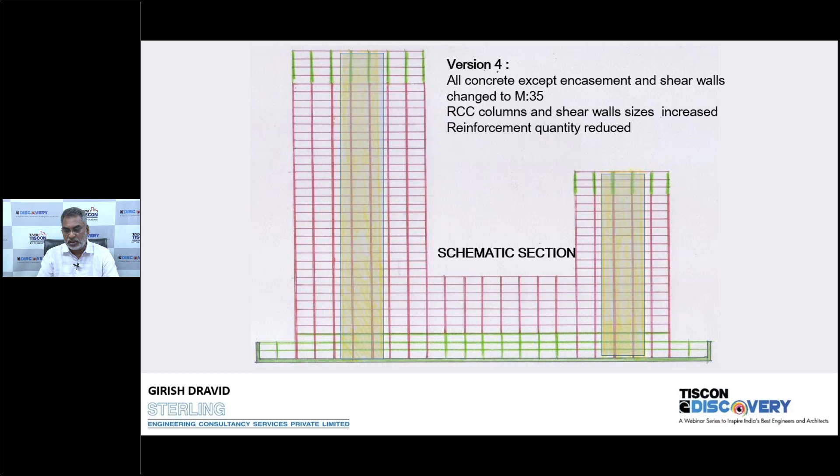This shows that it's not necessary to go for a complete steel structure, but wherever possible, try to use concrete as well. Of course it depends whether it is possible to do it with the architects and owners. But now the cost has come down to 1203 rupees, almost 1200 rupees a square foot with all the changes.

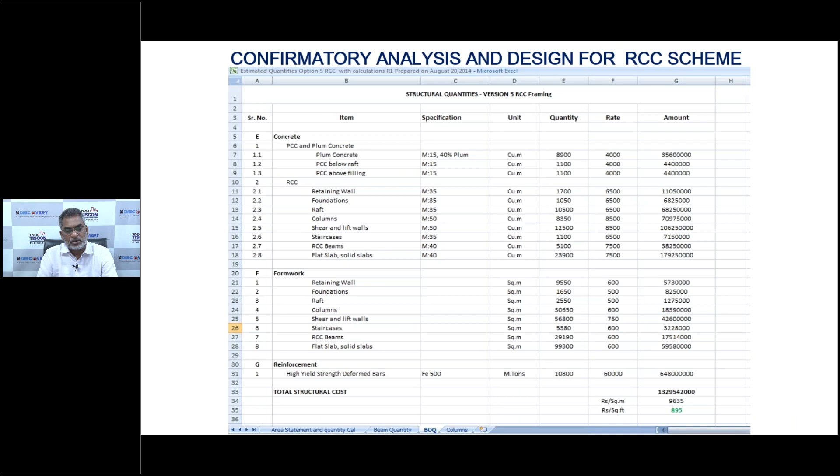So these are the 4 cases, from 1360 rupees to 1200 rupees per square foot. We did all this analysis. And 895, almost 900 rupees, was the cost estimated for an RCC building. So that much increase was acceptable to both contractor and owners.

Key achievement is we could save over the tender cost by almost 11.5%. The exercise was completed in 45 days. It took 45 days for us to come to this. But here the cost was fixed for the owner for the given design brief. I must commend the owner and architect for allowing the contractor to use the changes.

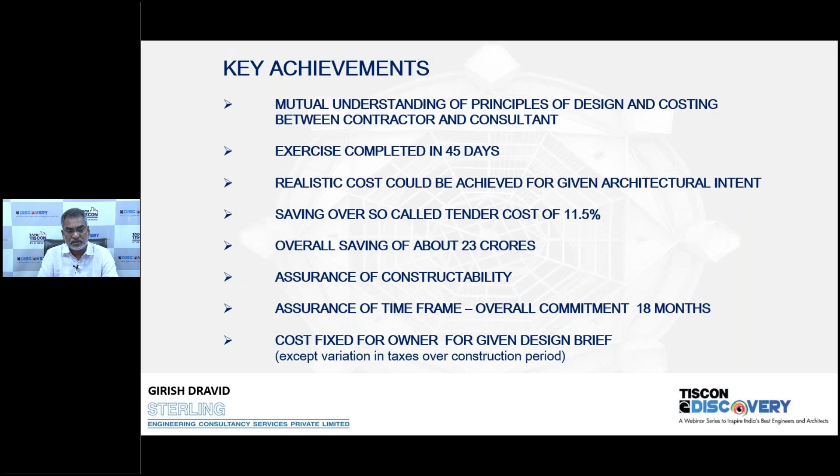So I'll move fast now. If the owner had included architectural and MEP design in the bid process, flexibility in architectural shape and design was left with the contractor - not always, of course - but choice of finishing and cladding material was given to this alliance of architect, structural engineer and contractor. The concept of pain share and gain share was introduced in the whole process. The process can become quite optimized. This is the message I want to give.

So with this, I think I'm coming to the end of the presentation. If there are any questions - yeah, I can see that there is time only for 2 questions, and I already have 2 questions here.

The first question is: in your presentation you have shown commercial projects and sports stadia, etc. But what about residential projects in steel?

Well, we have also designed a couple of projects in structural steel. I have particularly designed a tall building, 250 meters tall, in structural steel. Again it's a composite building, but steel has been used. The developer is selling the premises with pre-finished spaces like false ceiling and walling, and he's hiding the bracings in the hollows of the walls and all that. So that trend is catching up. There are 2 or 3 more proposals that have come to us for structural steel residential buildings. So people are thinking about structural steel in residential buildings as well.